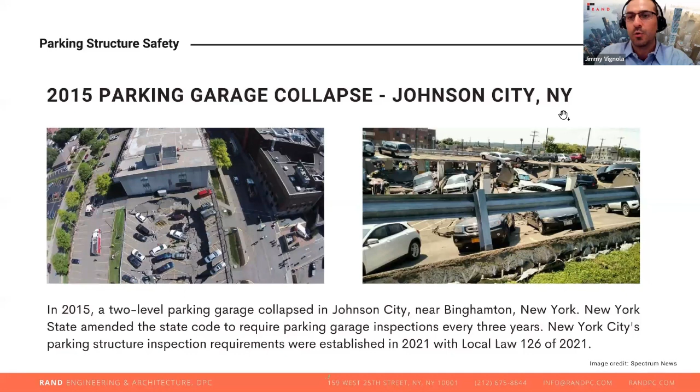The impetus for this program was this parking garage collapse in Johnson City, upstate near Binghamton, New York in 2015. You could see from the photos, the top level collapsed, caused a lot of damage. This incident pushed New York State to pass a new law that required all parking garages to be inspected by a qualified engineer every 3 years. New York City, since we have our own Department of Buildings, didn't immediately follow the law, sat out a few years until the city was able to develop their own regulation. But in 2021, New York City joined the party here.

If you have any need for parking structure inspection outside of New York City in greater New York State, we of course can do that also. All parking garages need to have a permit to operate in the state, so you needed to have an initial inspection. All garages should have had that initial inspection already. We'd be in the second or maybe even third cycle for some of these garages. Again, one due every 3 years.

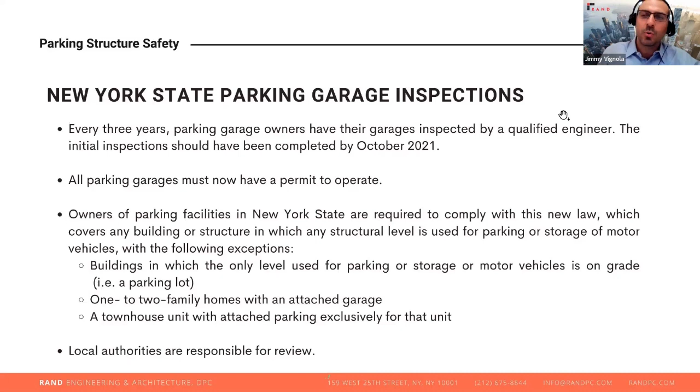All parking structures are required to be inspected. There's exceptions for single family homes, townhouses, and parking lots. In New York State, since the inspection reports have to go to one of various towns or villages, there are local requirements that somewhat vary between the different municipalities.

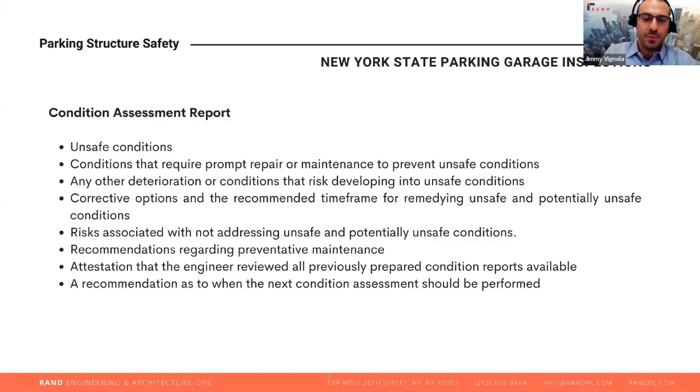The program involves us submitting a condition assessment report. This is similar to the city. We'll get in more detail here. Primarily, we need to identify unsafe conditions or conditions that require repair. We make recommendations, including timeframes. It also requires us to submit photographs and recommend maintenance measures that should be implemented in the next cycle.

In New York City, the program is called the Periodic Inspection of Parking Structures. It's PIPS, very similar to the FISP moniker that I'm sure many people are familiar with for the facade inspection program. We also see this program referred to a lot as New York City Local Law 126 of 2021. That was the initial moniker that most people were using. Local Law 126, not to be confused with PIPS.

Local Law 126 was actually the local law that established the new 2022 New York City Construction Code. So that local law included a lot of new regulations: building code, plumbing code, mechanical code, energy code, all of the above was included in this local law. Part of that Local Law 126 was this Article 323, which established the outline of the parking structure program.

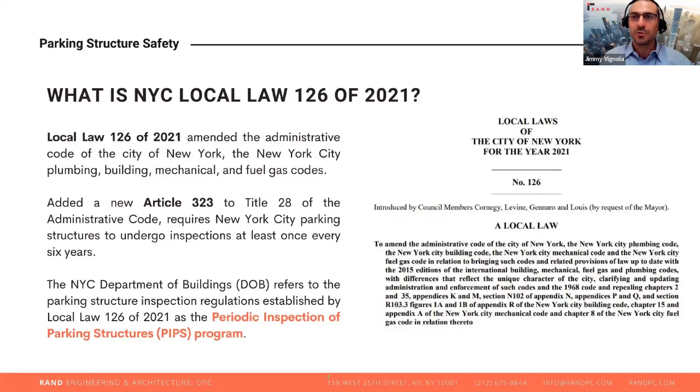DOB, now that we are well into cycle 1A, has started referring to this as PIPS. We are adopting that, and I think over the next few years, people will start dropping the Local Law 126 moniker, and we'll be referring to it as PIPS.

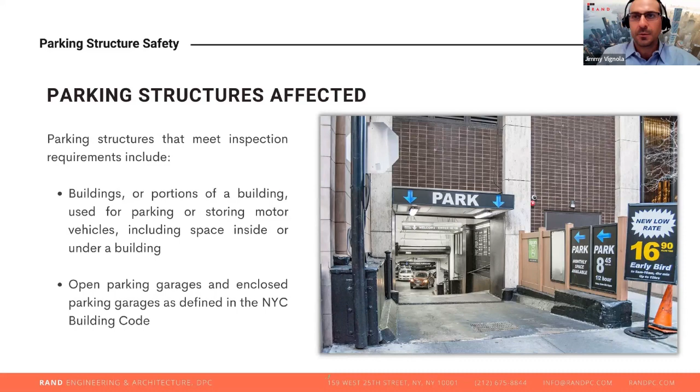The parking structures in New York City that need to be inspected include any building or portion of building used for parking. That includes parking structures in basements. It includes standalone garages, including open parking garages. So some garages have only partial exterior walls, and they're basically open to the exterior elements. Those are also subject to this inspection.

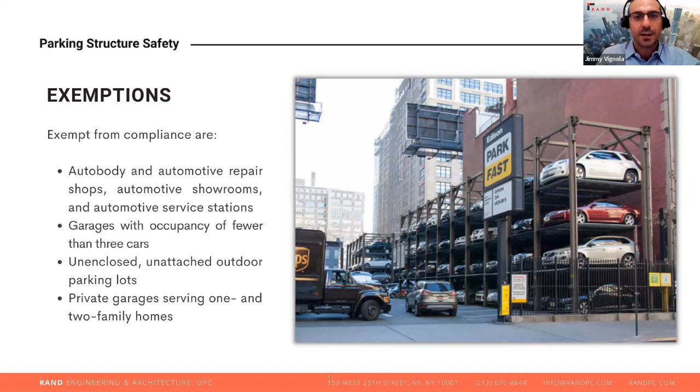What is exempt is a parking lot, such as the one in the picture, even if it does have mechanical car lifts. Those are exempt, no requirements. Garages with fewer than 3 cars, exempt, as well as auto body repair shops and showrooms. And also, we recently learned that loading docks are exempt. If you have a loading dock and you're worried about that, that is exempt from this.

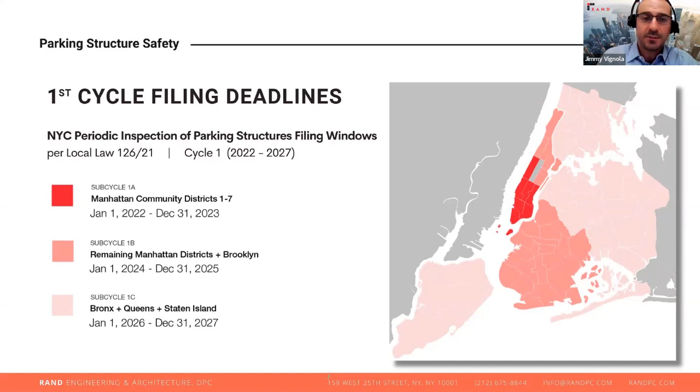Cycle 1B will start in January. That's Brooklyn and the rest of Manhattan. That's kind of the middle shade there. And the lightest shade is 1C, Bronx, Queens, and Staten Island. That'll kick in 26 and 27. And then in 28, we will start all over again.

New construction is subject to this regulation. It depends on the time of the first CO or TCO. If the 6-year deadline falls within the initial filing period, then you do need to file within those first 6 years. But if 6 years extends past your initial filing cycle, then you can wait till cycle 2 to file. So it depends on when that CO or TCO is issued.

If you have a question on new construction, you can call us. We'll help you through it. A matter of a couple days at the end of the year or a month might give you 6 more years to file that first inspection.

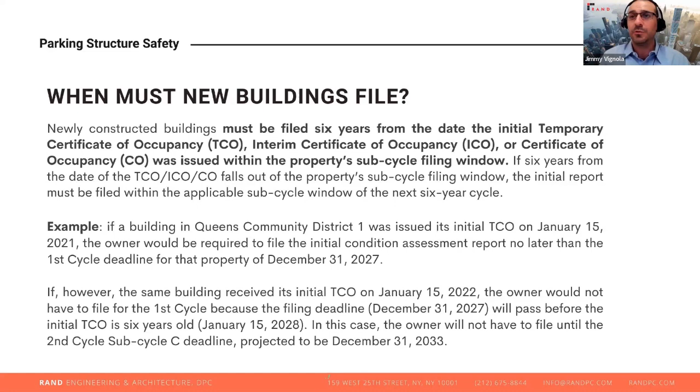So the regulations again started 2022. You have to be inspected every 6 years. The inspection needs to be done by a qualified parking structure inspector, such as Jason here. For the QPSIs, you need to be a licensed engineer. You need to have 3 years of experience with parking structures. You have to be certified with DOB.

So Jason submitted his application to DOB, and then after reviewing his qualifications, they actually schedule an interview and they ask very pointed questions about how you would handle certain situations. There's actually people at the DOB parking structure forensic unit that are vetting you, to make sure you really are knowledgeable about parking structures, common problems and how to fix them before you get that QPSI designation. So if you don't go to RAND, which I don't recommend, make sure they have QPSIs.

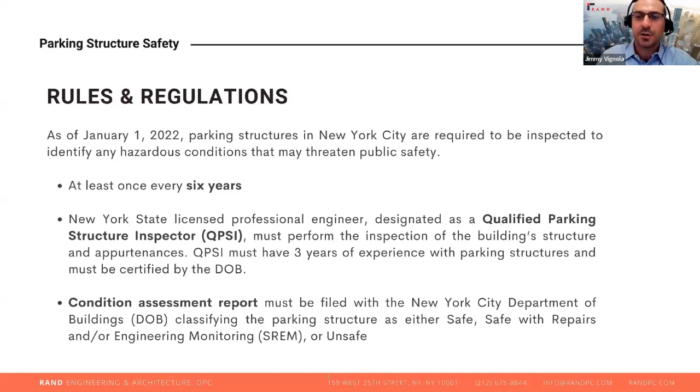And then the QPSI oversees the process. The final result is submitting this condition assessment report, where the bottom line is the parking structure classification: safe, unsafe, or the intermediate and most common, safe with repairs and/or engineering monitoring, which we call SREM.

The process of inspection basically entails review of documents. We love getting structural drawings. If you have the original structural drawings of your building, it makes this process a lot easier for us. Often we don't. If you have some other alteration, repair, or program drawings, that's also helpful. So send us any documents that you have. We also review violations. We will review FISP reports in some situations where the facade is included in the inspection. We'll touch on that a little bit later.

And then the inspection process requires that we review previous reports on the parking structure. So here in cycle 1, we're not doing that, but when cycle 2 starts, we will be looking for the cycle 1 reports and we compare and contrast what was required, make sure it was done, just kind of check up on the results of the first one.

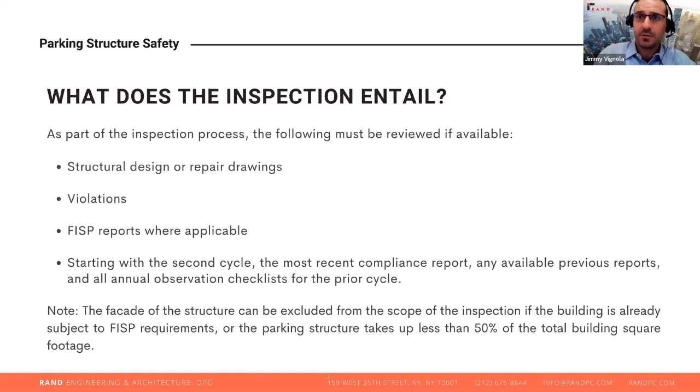The facade of the parking structure does need to be included in the inspection if the parking usage in the building exceeds 50% of the total square area, regardless of height. So if you have a 4-story standalone garage in Manhattan, that facade also needs to be inspected. The typical parking garages that are in the basement of a building in Manhattan, we are not inspecting the facades there. But occasionally we run into one that requires a facade, and of course, that makes it more labor intensive. It makes it a larger study for us.

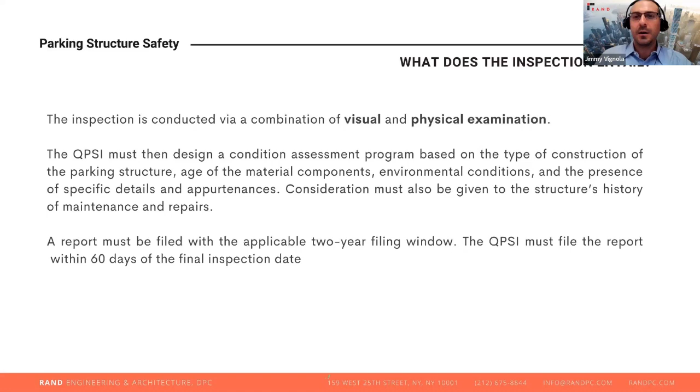The inspection must include both visual examination and physical examination. Typically, we do an initial walkthrough with the QPSI and some of our other associates. That's the visual part. We come back to the office, we use what we see for planning how much physical examination, where, and the type that we need. The regulations require that we do physical examination on 10% of each type of structural element. That could include sounding. I'm getting a little ahead of myself.

So here's the visual walkthrough performed by our team, and here's the physical examination. The 10% of each element. Mostly we are doing sounding. We have these tools that allow us to sound floors and columns and overhead structures without needing too many ladders and hammers and too much assistance. So we do a lot of our physical examination this way. We can even do it sometimes during the initial walkthrough, kind of doing both at once.

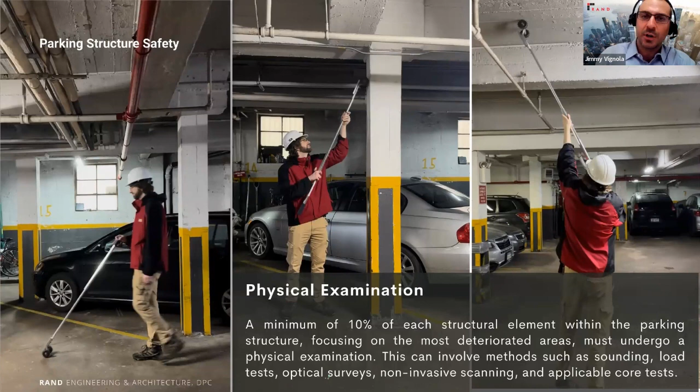But depending on the conditions that we encounter, we may need to do more intensive physical examination, including probes, GPR scans, material testing. All of those things are in play, but most commonly, you're going to get a good amount of sounding by our team.

Once we complete visual and physical examination, it's then time to put the report together. DOB has given us a very specific list of things that the report must include. We have to describe the structure's gravity and lateral load resisting systems. The drawings help with that, although we can do a lot of it visually. We have to, of course, describe the existing conditions. We have to give them photographs, and we have to provide itemized recommendations for each item that requires repair, all of the SREM items. We also need to include that review of the previous cycle.

And a key difference between PIPs and FISPs is that in this program, we have to include a structural stability analysis, both of a typical scenario and a worst case SREM condition. So we are actually putting together engineering calculations and submitting them to DOB to show that the structure is capable of supporting the required loads, both in its unaltered state, and if there is an area with significant deterioration, we need to analyze that and show that even that significantly deteriorated area is capable of supporting the loads that are imposed. And if it's not, well, it's not SREM. That would be an unsafe. Luckily, so far we haven't found any of those.

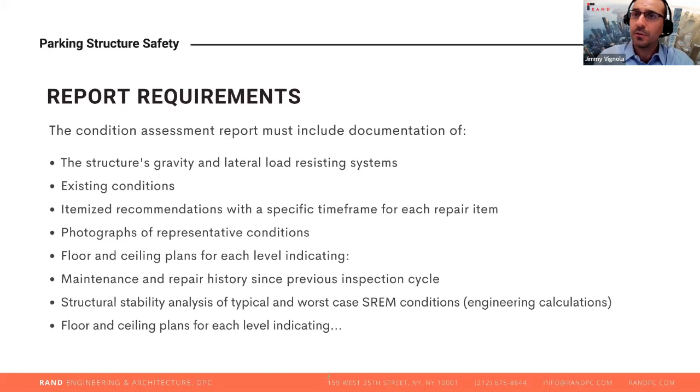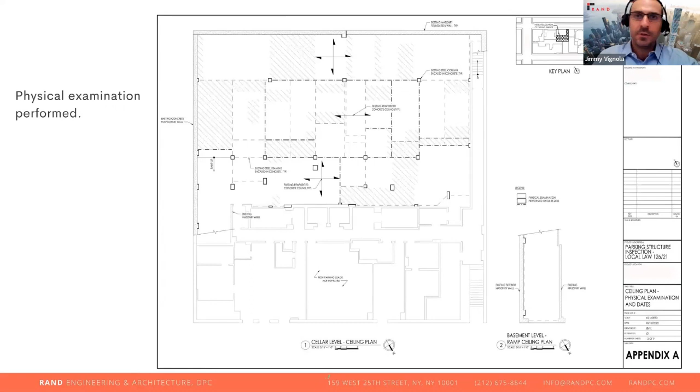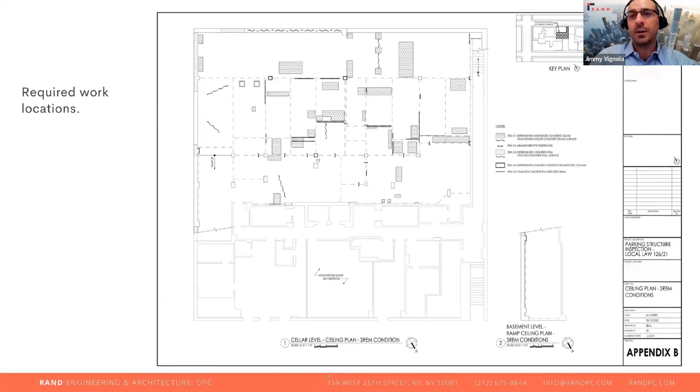We also need to include floor and ceiling plans for each level. We have to do 2 sets. The first set is going to show where we did our physical examination. DOB is checking the 10% here, and then we submit a second set of drawings that show the required work areas. Here, this plan, showing cracks, we're showing areas that need to be patched. So there's structural analysis and also CAD work involved in these reports.

Another thing we have to do is develop a unique annual observation checklist. This is specific to your structure. We try to give you a rundown of what should be checked in the years between the 6-year inspection cycle. It's required for us to give you the checklist, and then it is required for owners to perform this annual observation using the checklist in between years.

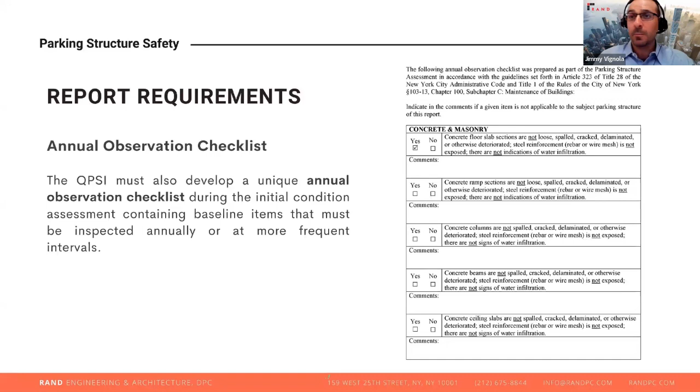You don't need a QPSI to do it. You don't need a PE to do those in between years. We try to set this up so that it's easy to do. You can do it with your staff, but of course we're available to help. So we submit this, and then you have to use it in the following years.

Report has to include this classification: safe, unsafe, and SREM. If it's unsafe, it needs to be repaired immediately. Safe structures require no action, and SREM actions are somewhere in between, right? Not immediately and not none. They require repairs, and we have to give a specific time frame: 1 year, 2 years, 3 years, depending on the severity of the condition.

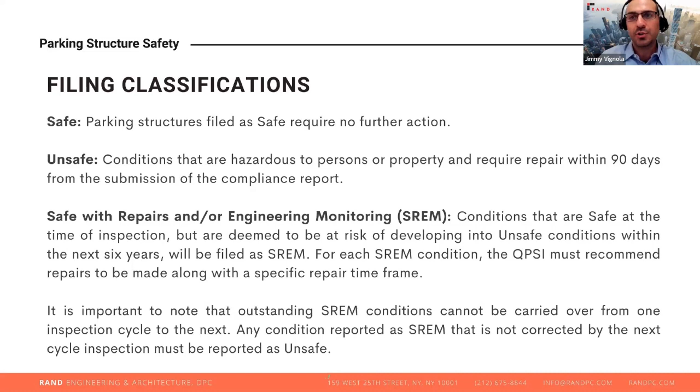It's important to note that SREM conditions, if they are not fixed when we come back 6 years later, are automatically unsafe. We can't call them SREM again. So if you have a SREM building, it's very important to get the repairs done before we come back in 6 years. Unsafe conditions need to be repaired immediately.

We also are supposed to inform the DOB, and we have to take actions to protect public safety. That could be closing a couple parking spaces. It could theoretically be closing the entire garage. We have not run into that, but the possibility is out there.

You have 90 days to correct the conditions. If for some reason we can't get it done in 90 days, the QPSI can file for an extension for another 90 days. As long as we're on top of it, we're doing something, we're showing progress, we can continue to get extensions. After they're all done, QPSI has to come back again and certify that they're done. The unsafe conditions have been addressed, and the building is no longer unsafe. We would then submit an amended report to say that it's SREM or safe.

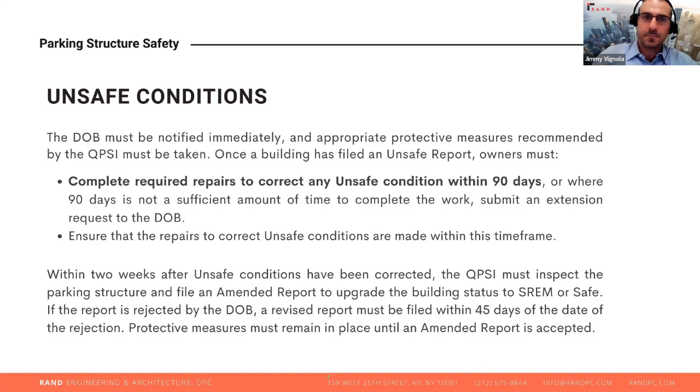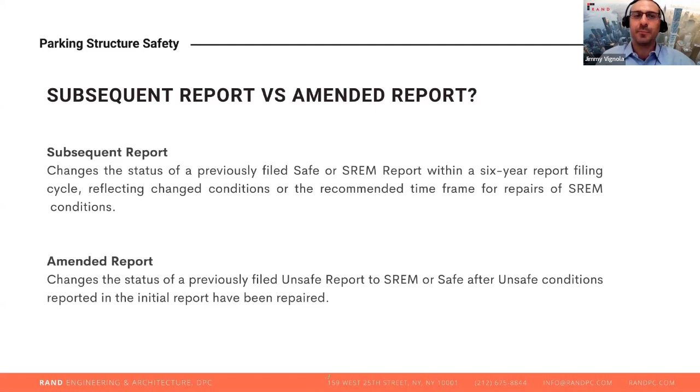So you'll hear these terms: amended report and subsequent report. The amended report, as I just mentioned, is specifically for going from unsafe to SREM. A subsequent report is to change some other aspect of the filing. Maybe you could go from SREM to safe, or maybe we could be modifying the time frame that is required to do the SREM repairs. Amended reports are critical if you get it unsafe, but subsequent reports, there's usually a little bit of play in there.

Starting April 17th, this whole process to submit the reports has been moved to DOB NOW. We were sending paper PDF reports for a while, and they were accepting them. That's all out the window. I assume most owners and property managers are somewhat familiar with DOB NOW by now, because you have to go on it for FISP and also for any jobs, any alterations, repair jobs. Everyone's got to go on DOB NOW at some point to sign e-sign forms and pay filing fees. So all of that is now in.

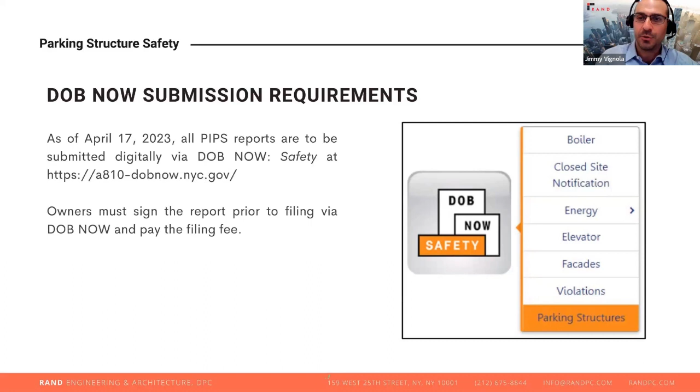You can see on the right there, that's where you find the parking structure has been added to the menu, a little bit below where you would find facades. There's filing fees. It's $305 for an initial filing, and further fees for subsequent and extensions. There are fees and penalties involved if you don't file on time. These are similar to FISP. They're going to ding you $1,000 a month for late ones. For failure to file, you get an extra $5,000 after a year, and failure to correct conditions, again, it's $1,000 a month. So it's important to stay on top of those.

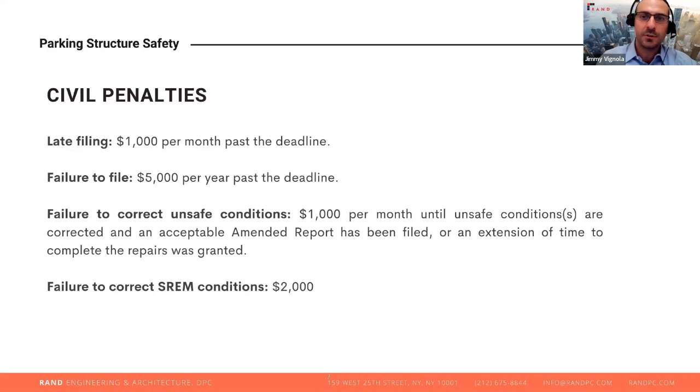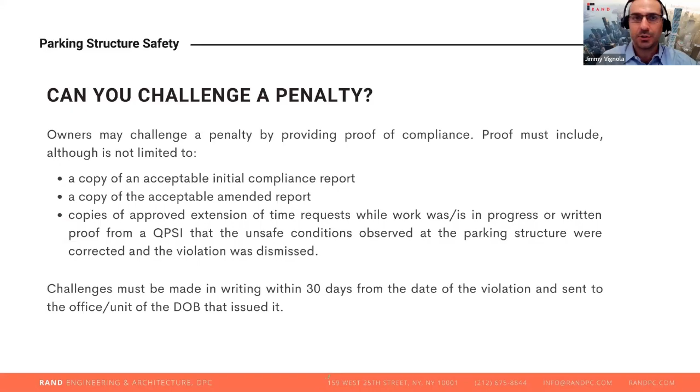If you get a penalty and you want to challenge it, there is a process involved. You need a QPSI involved, and you need to do it within 30 days of receiving the violation. We can help you with that.

So the next part of the presentation, I'm going to hand it over here to Jason. Jason can talk a little bit more about specific things that he is seeing on site as the QPSI. He's going to all of these. I work with him on the technical side, report writing. So the two of us are basically overseeing all of the PIPS reports right now coming out of Rand's office. At this point, we did actually get one garage accepted by DOB. We have another batch that's in the objection stage, and we're giving them additional information, and another batch that we've observed, but we haven't submitted the report. So we're about 5 to 10 parking structures in.

So we thought it would be a good time to have this presentation. We could actually share what we're seeing, and also the feedback that we're getting from DOB, because that was the big question for us going into this whole process: the conditions that we're used to seeing from our typical experience doing garage repairs for many years, what was the DOB gonna think of them? So now we've gone through that, and Jason is the point person for all of us. So I will turn it over to Jason, and he'll go through the rest of the presentation.

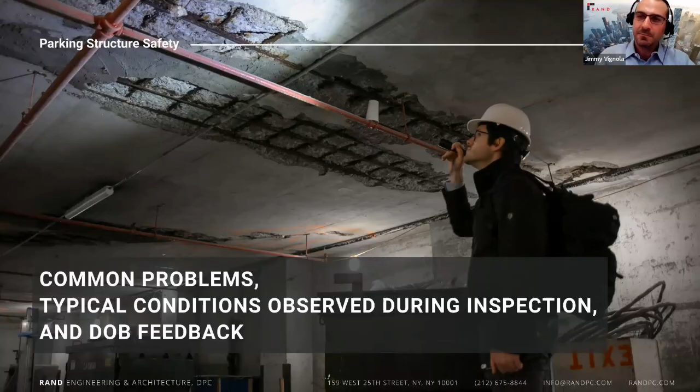As Jimmy mentioned, I'm a senior structural engineer at Rand, also a qualified parking structure inspector. I've been at Rand about 12 years, and a lot of my work has been in parking structures over that time. I'm going to go through some common problems that we see in garages first.

The number one problem, the item that causes the most deterioration in these structures, is water and de-icing salts brought in by vehicles. The vehicles that park in these garages are outside in the elements, rain, snow, driving on the roads. In New York City, we salt the roads, so water getting in via those means gets into the concrete. It causes deterioration. The salt and other chemicals in the water further accelerate deterioration. So that's the number one source of issues in these garages.

Another source of water is water infiltration from exterior sources. A lot of these garages are subgrade structures, which have foundation walls, and on the other side of the foundation walls is potentially groundwater. Water can leak through cracks in walls, and once that water is in the garage, it not only does damage to the walls, but it can damage the parking surface as well.

And a lot of garages that we've seen are also located below plazas or terraces, which creates another source for water to enter. The plazas and terraces need to be maintained, with waterproof roofing membranes over them, to make sure that exterior water is not getting into the garages. Like I said, there's really no way to avoid water getting in the garage, but once that water is in, we need to make sure it's getting out.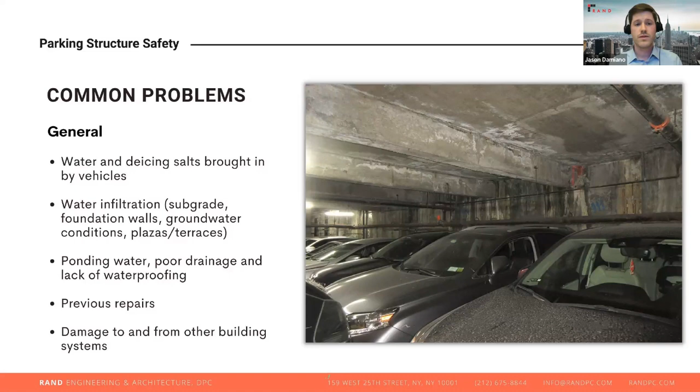And a final additional item that we often see is damage to and from other building systems. A lot of these garage spaces have mechanical systems installed in them, and those can be a source of damage due to the moisture and condensation we see on those lines, but they can also be damaged by the types of damage we are seeing in these garages, just the same as the structure itself.

So moving on now, I'm going to get into some specific conditions that we've seen. This is a pretty typical concrete parking garage. You can see the level of spalling occurring in the top side of the concrete structural deck. In this case, the concentration of spalling is particularly strong around where the wheels of the cars are. When a car pulls into this spot, the water starts to shed off the car. As it parks overnight, it all comes down straight into the slab.

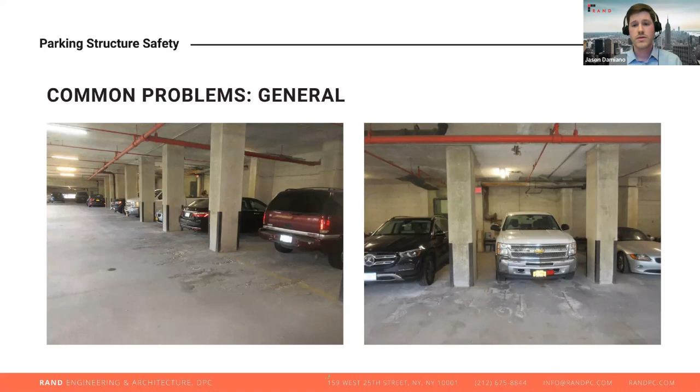That's definitely the worst case scenario. And when we saw this condition, we were concerned about it. So we proceeded with probes. We made sure that we got down to a depth of concrete where there was actually sound material. And we were able to quickly confirm that the concrete wasn't unsound all the way through, and therefore we didn't need to install emergency bracing. But this is one of the main things we're looking for: not just, is this a localized problem in your parking structure, but how does it tie into the overall building system?

And these are other common problems. Like I said, garages are often located below terrace spaces. If those terraces and plazas are not maintained, that water can get into the terraces and then can go straight down into the garage. So this photo on the left is an example of an under-maintained terrace area located directly over a garage. That water goes in, gets in that slab, goes through it, goes straight into the garage, and it's just another added point of water infiltration deteriorating the garage.

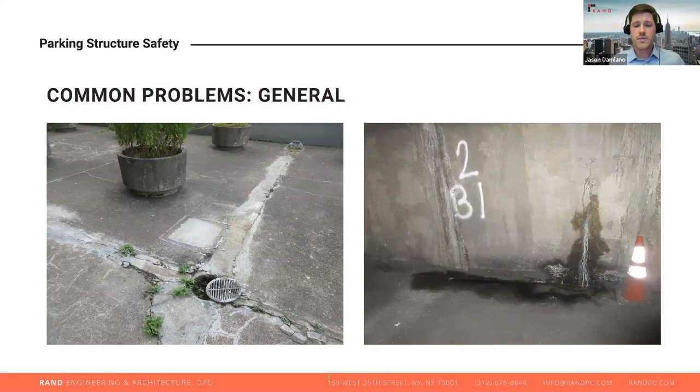And on the right, you see a typical garage foundation wall where you're getting through-wall leaks. Those leaks are likely groundwater. I go in some buildings where they say the leaks are much worse in situations where they get heavy rain because the groundwater kind of swells up. So once that water is in, it's not only damaging the foundation wall, but it also gets into the parking structure slab as well.

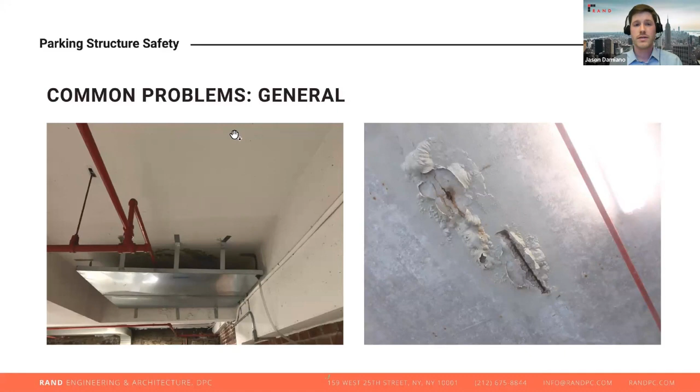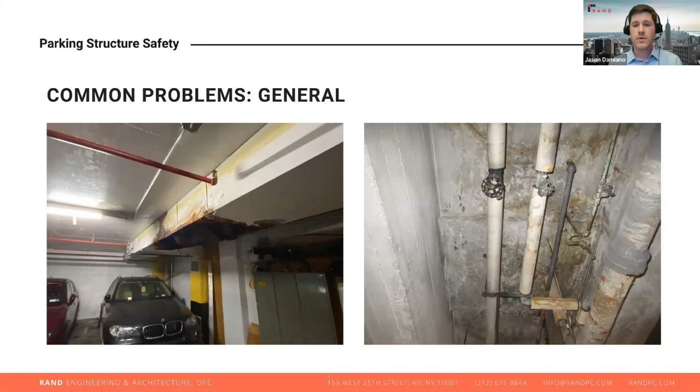It's actually just damage being caused to the concrete structure by the mechanical systems, which are leaking. There's insulation on these pipes, but they're not fully insulated. This type of moisture causes the same damage to your structure as any other source of moisture. So it's just another thing that we see in these garages and another thing to keep an eye on.

In addition to your typical mechanical and plumbing systems, we also have electrical conduit lines. All of the garages that we go into have lighting. Unfortunately, a common practice at one point in time was to actually embed these conduits within the thickness of the structural concrete decks that we see in the garages. Unfortunately, those conduits are just as prone to corrosion as any other type of metal in the slab. As you can see in that photo on the left, the conduit is completely deteriorated. You can see the wires within it.

This is also something that causes problems in the slab because unlike rebar, which is solid and tied to the structure, the conduit actually has space inside of it. So once water gets in the conduit, it can actually travel along the conduit and damage a new area. And the other thing that's dangerous about these embedded conduits is they can look like just rusted rebar, deteriorated rebar when contractors are doing demolition. So it's something contractors have to keep an eye on to make sure they don't jackhammer directly into a live wire.

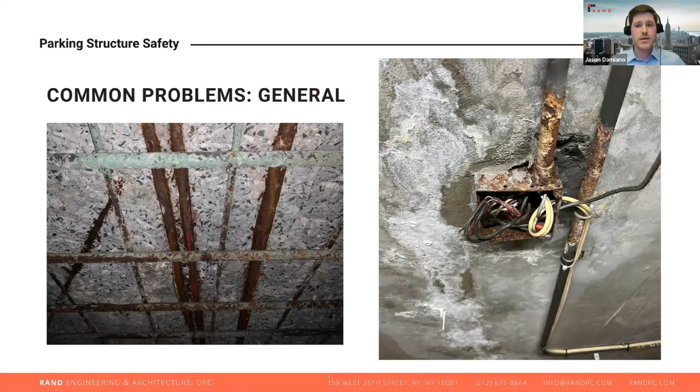And then on the right is a typical surface mounted conduit line, part of this parking structure's lighting system in the garage. Unfortunately, there's a leaking crack right in this area, and these systems are just as susceptible to the types of deterioration we see as the structure itself. And again, DOB is making us review these items. So just another common problem that we see.

Now I'm going to talk more about the specific materials that we deal with. A lot of the parking structures that we see, almost all of them have at least some level of concrete installed. Some of them are reinforced concrete structures. Some of them are steel frame structures that have concrete decks, but most of the driving surfaces and the structure supporting driving surfaces are concrete. Concrete is prone to cracks. Most of these types of structures do not have design joints in them. They are designed to span long distances, but cracks are a natural thing in concrete. Your typical shrinkage crack, you see them all over the place. You walk down the sidewalk, you might see them. Concrete is very prone to cracking.

Unfortunately, once there's a crack, there's also a place for water to enter the structure itself. Once water is able to enter the structure, it can make contact with the steel reinforcing within the concrete. That causes the steel reinforcing to deteriorate. Once it deteriorates, it starts to expand, and it causes the concrete cover to separate from the rest of the concrete slab or concrete beam. This is a process called spalling. The actual concrete separates, and in this case was removed, showing the exposed rebar. But cracks and spalling are the two main items that we see in concrete slabs.

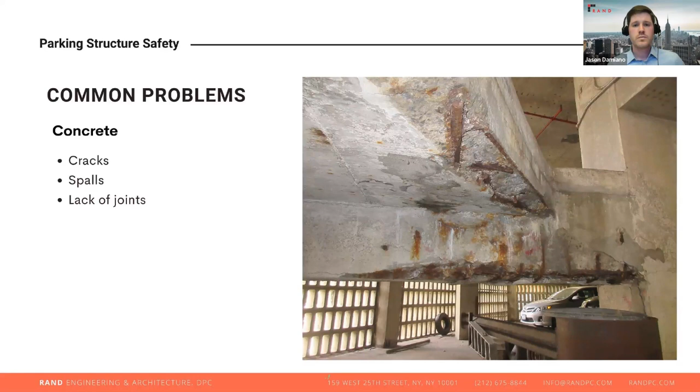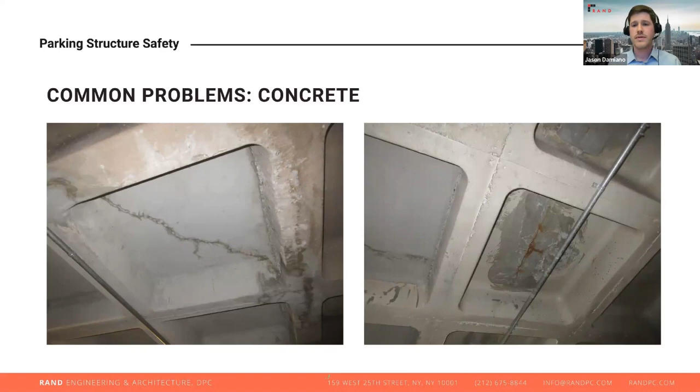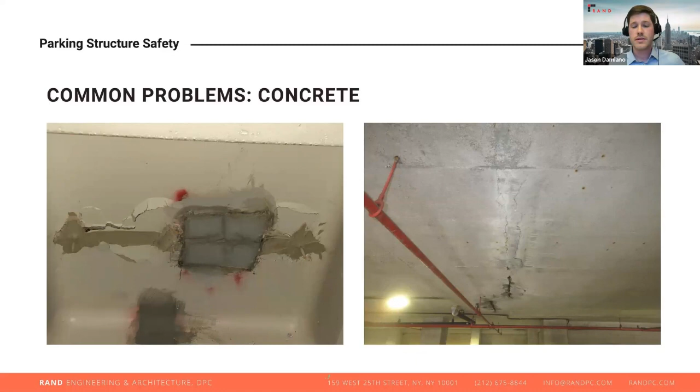And at the bottom of the photo, you can see concrete has spalled off the rebar. The rebar is now exposed and it is deteriorating. So it's kind of the entire life cycle at once. But these are the typical type of common problems that we see in concrete, especially relating to cracks. And then the next slide, we talk about on the top of the slab, we see very similar conditions.

A lot of these slabs are designed to have top and bottom reinforcing. So the bottom reinforcing, you see when the rebar deteriorates, the spalls pop off on the bottom. On the top, the spalls don't really go anywhere because they're not pulled off by gravity. So you just have a situation that can create trip hazards, potential damage to cars, and also is in need of repair.

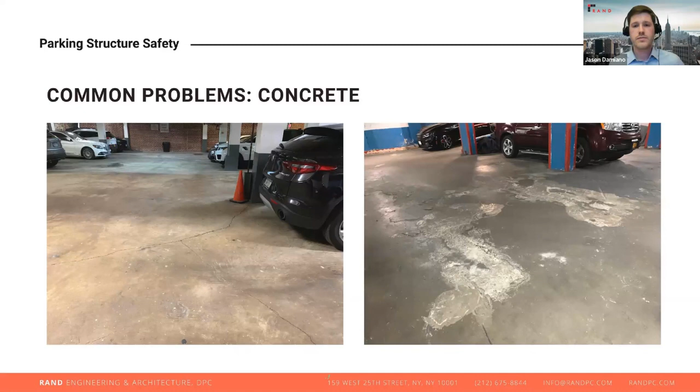Steel beams deteriorate in the exact same way that steel rebar does. As water accesses the surface, it will start to expand as it corrodes, and this expansion causes whatever is surrounding the steel to expand and crack.

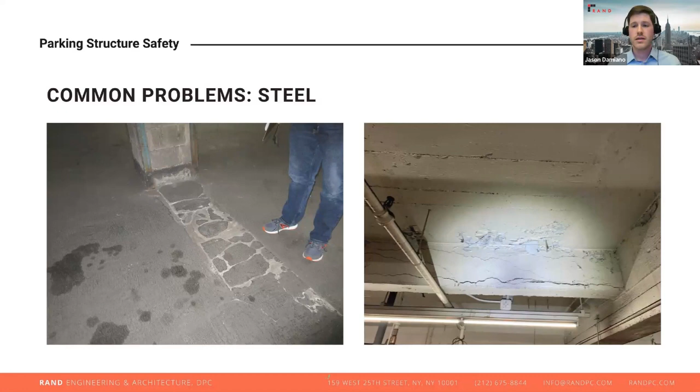So in the photo on the right, very typical condition of a steel beam encased in concrete. That concrete encasement is now cracking and at risk because that steel has started to deteriorate. This is both initial cracking and starting to get to the point where it's spalling and potentially hazardous.

The other thing that we often see in the steel frame structures is instead of concrete columns, you have steel columns. The steel columns are often encased in masonry or concrete. One of the issues that we commonly find is that, especially when columns are encased in masonry, they might not be as tightly packed. So you don't necessarily see immediate evidence that the steel is deteriorating. So you can open up and kind of run into a surprise at how bad the steel is.

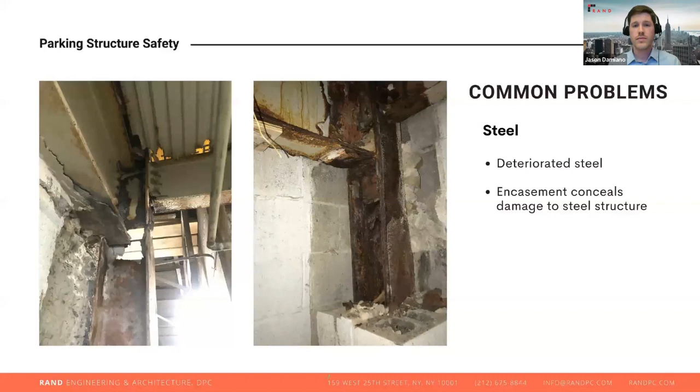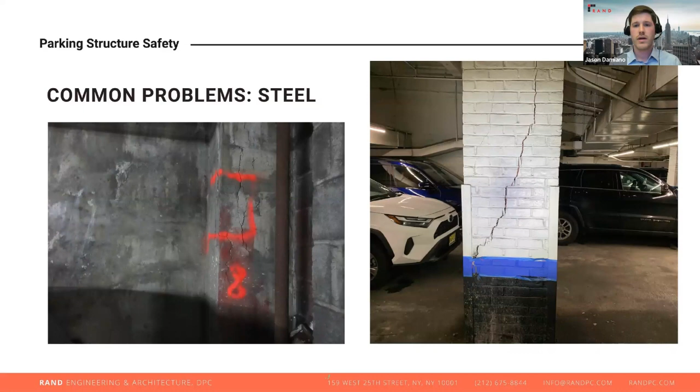Now I'm going to get into a few specific cases based on feedback that we've gotten from DOB on the difference between SREM conditions and unsafe conditions. One of the things that we are trying to emphasize as we go through this is that a lot of these conditions might seem fairly typical and, oh yeah, that's spalling, that's cracking, there's some water getting in, but there are differences between these different types of conditions, and it does sometimes take a trained eye to really note the difference.

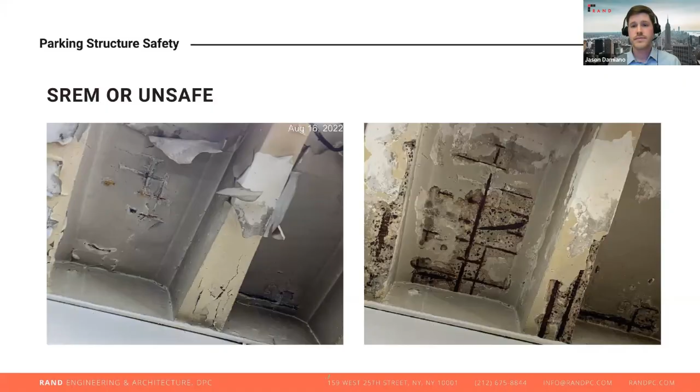This is kind of like the next stage of a SREM or unsafe condition. I just want to show here that it's not always quite straightforward. We can't always just look at it and know from a photo what the answer is. So in this case, any of the unsound material that looked like it was potentially loose has been removed. We do see exposed rebar. That rebar is deteriorated to some extent.

So the way to figure out whether this is an SREM or unsafe condition is not just via visual inspection. We have to perform the aforementioned stability analysis by measuring the rebar and showing that this condition can take the loads that it was designed for in its deteriorated state. So this is kind of a borderline SREM or unsafe, depending on the results of the stability analysis. It's not about just the condition that it's in, but specifically what we find when we do those calculations based on the conditions. Just wanted to show that it's not always just that easy to look and give the answer based on what DOB is making us submit as part of this process.

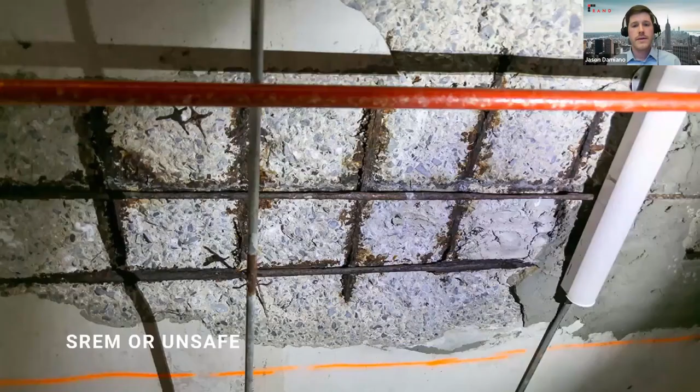And then this is the final SREM or unsafe condition I'm going to go through. This is one that, unfortunately, we can look at pretty quickly and determine that is unsafe because of what we know DOB is requiring us to submit regarding SREM conditions. In this photo, we see a pretty severely deteriorated concrete slab. All the spalled material has been removed, but unfortunately, the rebar going up and down the screen in this photo is almost completely deteriorated, disintegrated. What you see there is mostly just staining on the concrete from what's left of the rebar. So there's no rebar to measure in that case.

And the larger bars going from left to right in the photo, you can see are very thin. You can see how thin that particular rebar gets just to the left of the light on the right side of the photo. The rebar has reached a point where it probably lost 75% of its section. We know by looking at this that there's no way we can perform a stability analysis that would show it can take the loads that it was designed for. So this is pretty easy to identify as an unsafe condition. But that's the type of thing that we're doing as a trained eye, qualified professional. Typical garage staff or someone who's in these garages is not going to be able to notice the difference between these things.

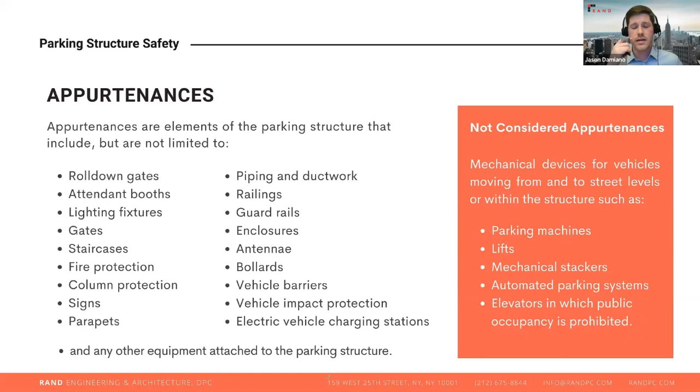The other thing DOB is making us note in these reports, that I have noted on a couple of occasions, is appurtenances. These are things like roll down gates, guardrails, signs within garages. Anything that's attached to the structure needs to be reviewed. Things like parking lifts and stackers are not part of the appurtenances that we need to review. And next, I want to get into what happened with last month's tragic collapse at 57 Ann Street.

This was a 3-story parking garage. It was a standalone garage. There was no building structure over it. It was originally built in 1925. And when it collapsed, it tragically killed 1 person and injured 5.

One of the things I've been talking about are the typical conditions that we see in garages. Unfortunately, some garages will reach a certain point where the conditions aren't typical anymore. This garage had certainly reached that point where the deterioration was so bad that there were likely different kinds of signs. And this is one of the things that we want to emphasize is that in severe conditions, there are also other types of cracks beyond the typical shrinkage cracks that we see causing the initial issues in garages.

But when a garage gets to the point where the structural distress is at a dangerous level, you will start to see flexural cracking and shear cracking that can indicate a potential collapse like this. So unfortunately, in this case, it is highly likely that the only people who ever accessed the upper level of this garage were the workers that had been in there for potentially many years. They weren't able to see the signs. They just saw this has always been deteriorated. But if a trained professional had been in there, they might have come to a different conclusion.

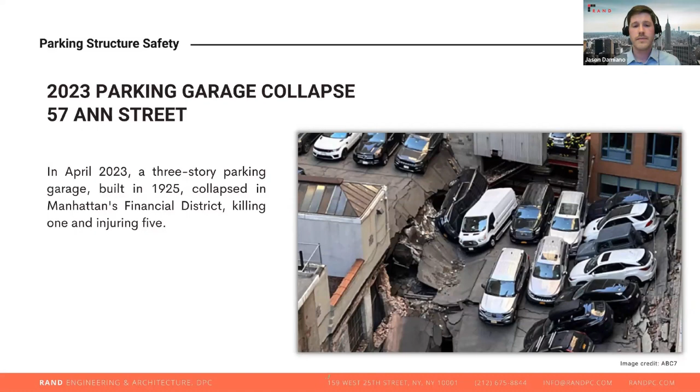And then, in addition to the obvious, at 57 Ann Street, this building did have a violation dating back to 2003 for cracks, spalling concrete, etc. There's no evidence that a major repair program was filed over the last 20 years. So unfortunately, not only was it bad enough to warrant a violation in 2003, it was never fully repaired. Conditions were able to keep getting worse over time.

Like we talked about with the stability analysis, when you have a situation where the slab is deteriorating, the structure is actually getting weaker over time. That's what we need to provide to DOB, and that was happening over the last 20 years in the structure.

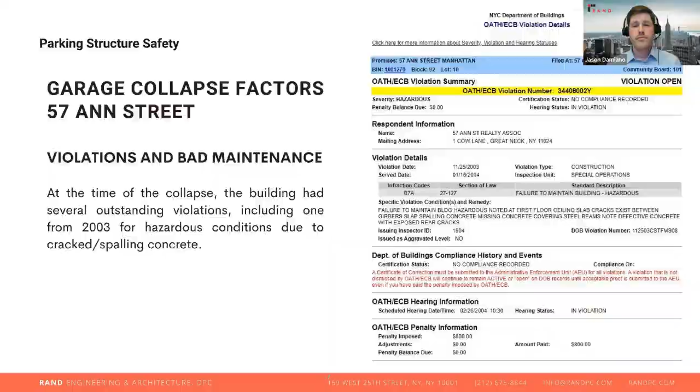And then, finally, the other factor here is that there was likely a weight capacity and overloading issue. The garage had extra lifts installed, which means that the loads in the garage were increased. So when you combine the fact that the original structure was never designed for extra cars, and then you factor in the fact that it's deteriorating and getting weaker, you end up with a situation where, unfortunately, the slab is just overloaded and it can collapse, and the worst case scenario can happen.

This garage was particularly vulnerable also because it was exposed to the elements. Like we talked about, a lot of garages have plazas over them. Unfortunately, this roof level of the garage was completely exposed to the elements and all of the water and de-icing salts that are brought into the garage. So this is a case study in the worst things that can happen, and unfortunately, it doesn't appear that an engineer was able to get in there and make the proper recommendation.

In response to this collapse, DOB has activated inspectors. As of May 15th, according to the New York Times, they have visited 187 garages. They've ordered 3 garages closed since that time and have partially closed 12 others. Their findings are very similar to what we've been finding, just to a greater extent, especially in these garages that are closed.

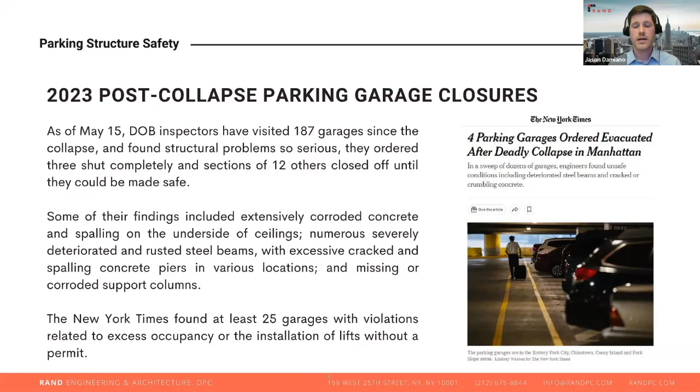The final thing I want to talk about is prevention and maintenance, because concrete and steel rapidly deteriorate due to the external and internal, from the cars, sources of water and chlorides. These parking structures are always going to be in need of some level of maintenance, if not full structural repairs. So if you can keep up with inspections and maintenance, you can really reduce your overall costs over time, and obviously create safe conditions, which really should be the goal of maintaining any garage.

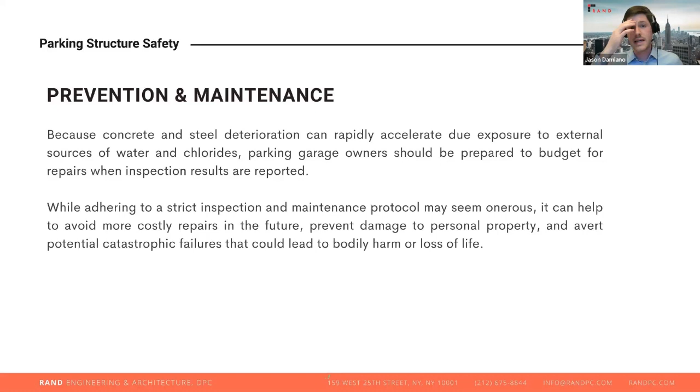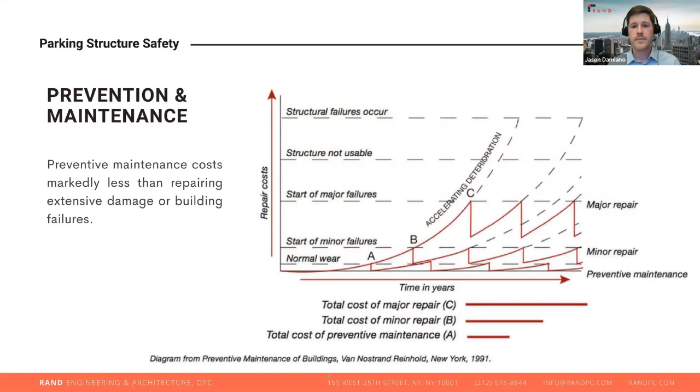And then finally, just want to go through some best practices for prevention and maintenance in these garages. One of the things that DOB is mandating here is implementing a routine inspection program, the every 6 years by a qualified professional, but also, as Jimmy noted, we are giving you an annual observation checklist to have that annual inspection performed.

Another maintenance item is just fixing these minor defects, spalls and cracks as they appear. Like we said, if water is able to get into the concrete via cracks, it's just going to keep getting worse. If you can keep up with repairing them and not doing a major repair program every 20 years, it's going to be much better. Also addressing leaks, make sure you are addressing the source of the water infiltration, because even if you do localized repairs, if the water is still getting into the garage, you're still going to run into issues.

And then, in my opinion, one of the most important things you can do is install and maintain a traffic bearing waterproofing coating, often called a traffic coating system. These are essentially waterproofing membranes that are designed to be driven on, because there is an inevitable source of water and de-icing salts that are going to come into the garage. No matter what, in all scenarios, the thing you want to do is make sure that water is not getting to the concrete, but it is protected by a waterproofing system.